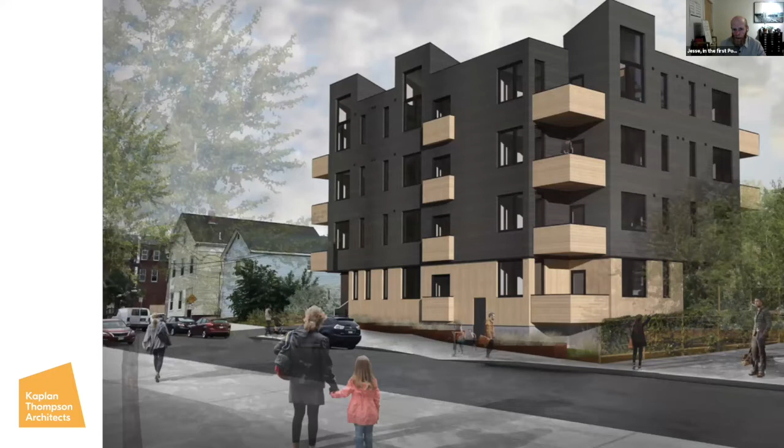And then these past years have been this. I decided this is rendering to reality. About 3 or 4 years ago, this building was a rendering, and our city of Portland put out lots in downtown saying that if developers came and said they would build affordable housing or workforce housing, they would sell them city lots. So this became a 23-unit building. These apartments have sold for $200,000. They're the cheapest home in Portland right now. These are apartments right in walkable downtown.

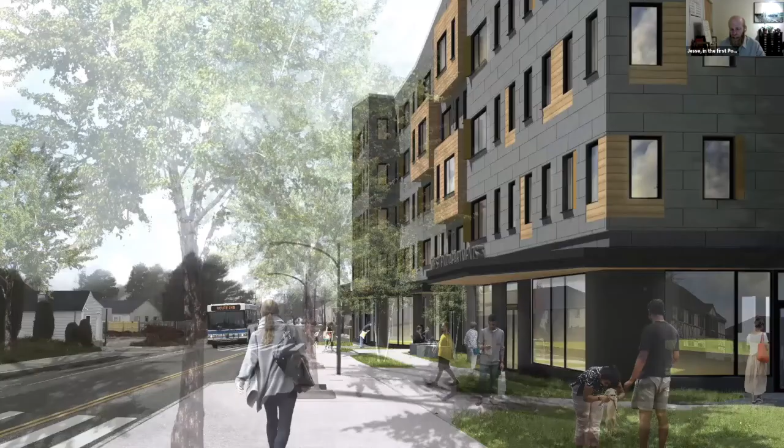This building, it's not a passive house, but it's got a lot of the techniques that everybody in this room knows. And the scale is growing. We're getting bigger and bigger jobs. This is a 5-story podium building, a 60-unit apartment building.

We are framing. We're going to go see the polished ground floor concrete tomorrow. This is for Avesta Housing, funded under the Affordable Housing Program in Maine. It's a tax credit building for folks who work in that world. Yeah, so this has to meet all the most stringent budgets, and it also has very strong energy efficiency goals.

But today, I'm here to unveil the trademark Nucifus system, the Northeast United States Passive House Enclosure System Package. Trademarked—not really, it's all generic. You can all use this.

This is the territory we work in to pull off passive house in affordable housing. We've had to develop this because we can't run new wall systems every time. We had to settle on something to be able to keep moving to get to scale. We were approached by a company in Massachusetts who develops affordable housing, and they work at scale.

They work from Virginia to New Hampshire in affordable housing, and they only do affordable housing. As state agencies up and down the country have started incentivizing passive house, giving bonus points in the competitive scoring round for affordable housing, they've been applying. They started saying, here's an avenue we can get into. They saw us give a presentation. They called and said, hey, you know how to do affordable passive house at crazy costs. Come help us do this.

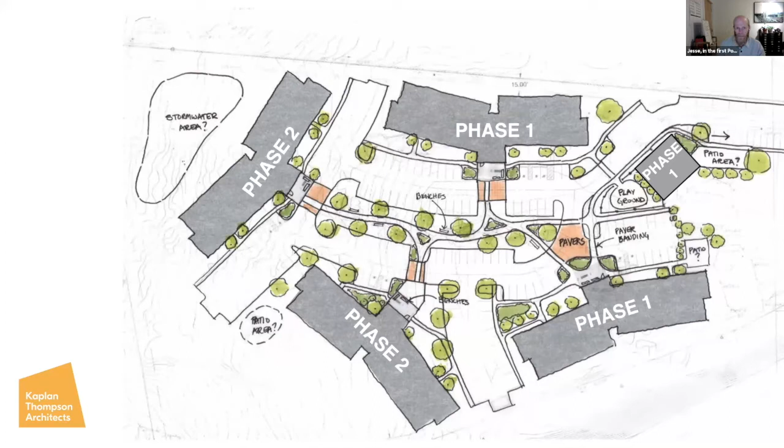And here's our very, very efficient floor plan. Again, sort of through the crucible of affordable buildings, especially affordable buildings in Maine, we build very compact floor plans, double-loaded corridors, these simple wings that you can crank around a joint with your lobby in it and bend it to site, have a good entrance.

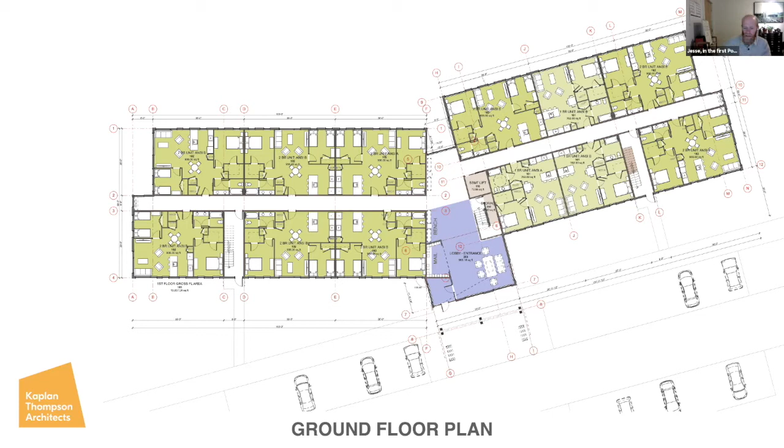Each building has a slightly different color at the accent in the middle, so you know which one's yours, you know where home is. You've got a place to maybe go have a picnic with your kids in the middle. A lot of parking. These are these funny lots, they aren't really rural, they aren't really urban. They're these suburban lots that they can acquire affordably. A lot of car parking in these towns, honestly.

Here's the next one. This is Cedar Pointe in Newington, Connecticut, outside Hartford. 3 buildings. This is an old auto dealership they bought. This is the kind of project these are, these very, very real projects.

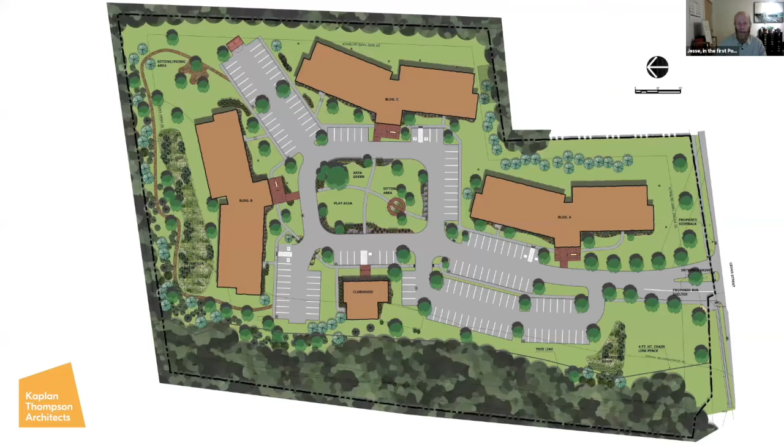3 buildings at this one, slightly different colors, slightly different roof lines. This is the prototype, getting modified. This is this funny thing, where does this fit in custom high-end architecture? But these are buildings that can fit into these New England communities, they have gable ends to signal the scale that fits into these communities.

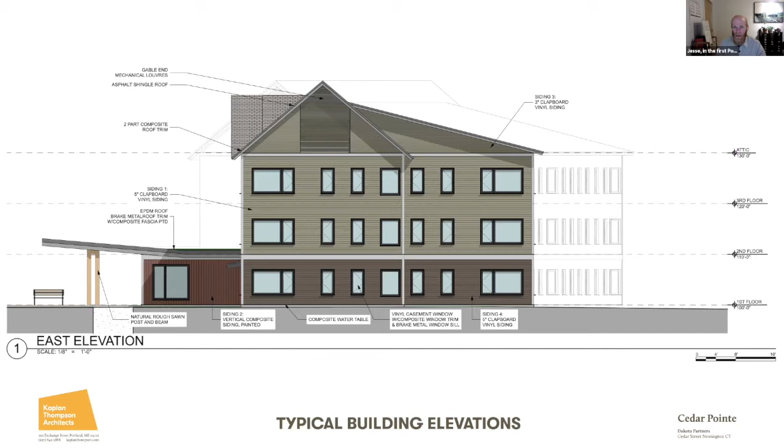Affordable housing is trying not to have zoning wars. They don't want angry neighbors. They get angry neighbors just about every community they come into. So it's trying to be fairly conservative for design. So here's the first one.

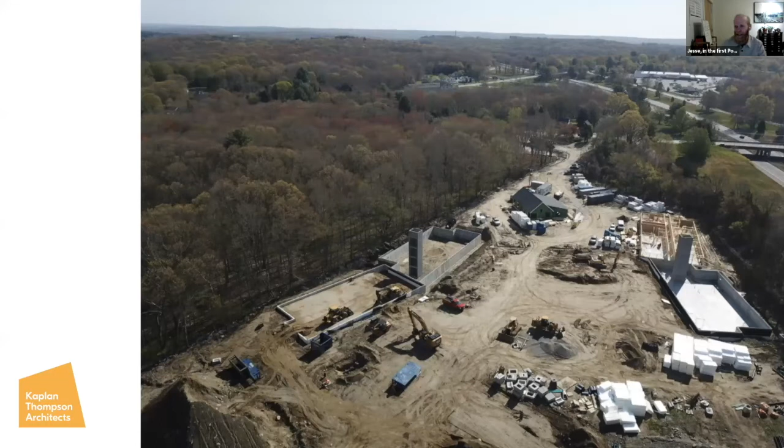Here's the building site from the drone, and you can tell it's a passive house because there's our giant white cubes of insulation scattered all around. Our sub-slab insulation going in, the giant pile. 2 buildings and a clubhouse.

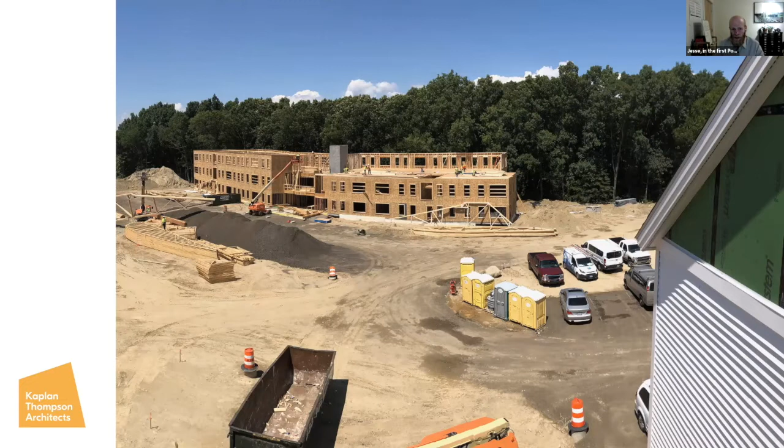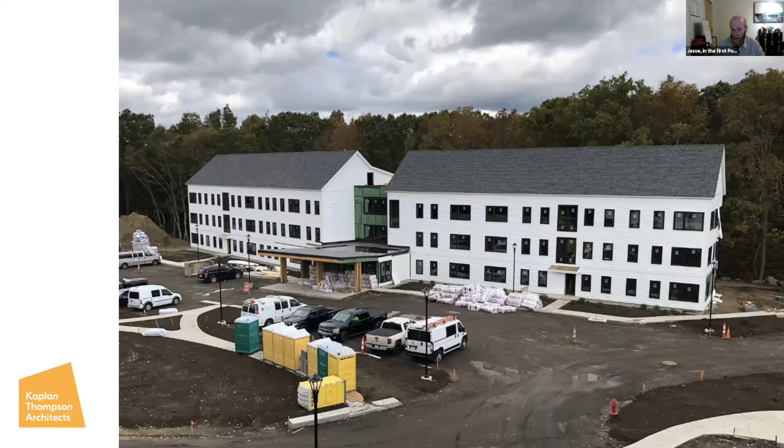You can see building going up, moving rapidly. Trusses over there stored. Multifamily building, this is familiar to anyone who works in this sector. Here we are partway through. Yes, that's vinyl siding on these buildings. These are, again, very, very tight cost constraint buildings going up, but all working and committed to be passive house.

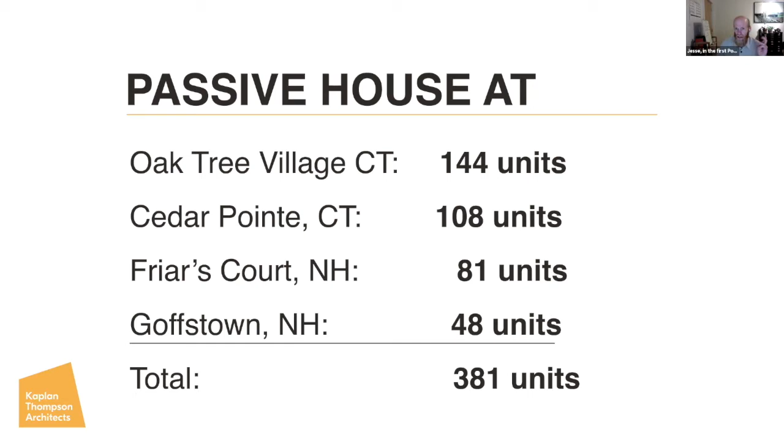So here's the matter of the scale we're working at: 144 units in Oak Tree Village, 108 in Cedar Pointe, 81 in New Hampshire, 48 in Goffstown, New Hampshire. 380 apartments rolling out of our little group, all committed to passive house, all getting built in 2 years probably here. So what are we doing? How do we do this? What's the system that has worked for us? I'm here to spread the word to everybody working in these kinds of buildings.

These are trying very purposely to be big, simple boxes. These are slab on grade, truss roof buildings, wood trusses, slab on grade, hopefully no basement.

Very simple geometries on purpose, not a lot of jogs in and out, not a lot of roof line changes, things that you can air seal easily. You've got a flat air barrier in the attic, a flat one on the wall.

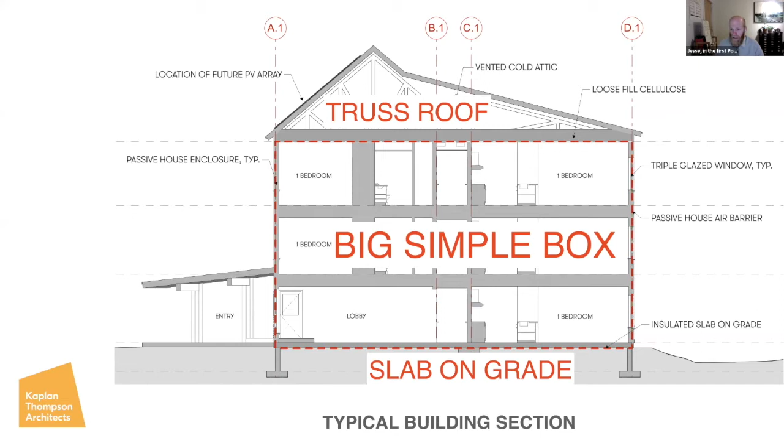We use exterior air barriers. Zip has been a savior for this market sector because not everyone can buy it, but everyone understands it. And then I think most importantly is, what's the ventilation?

The ventilation systems are by far the most critical thing we've realized in this, and we are doing very good ventilation systems, like 85% efficient systems, and sort of these rooftop or in the attic, or maybe at the end of the hallways. Companies like Ventacity and Semco and Tempeff and RenewAire, these really, really high efficiency systems, maybe 12 apartments per unit per ventilation box.

We're not doing one huge one, not hopefully one per unit. You are running it down the corridors, which are also crammed with tons of stuff, sprinkler lines and drain lines and hot water lines. But luckily they aren't insulated. They aren't moving heat and cooling. They are just sheet metal.

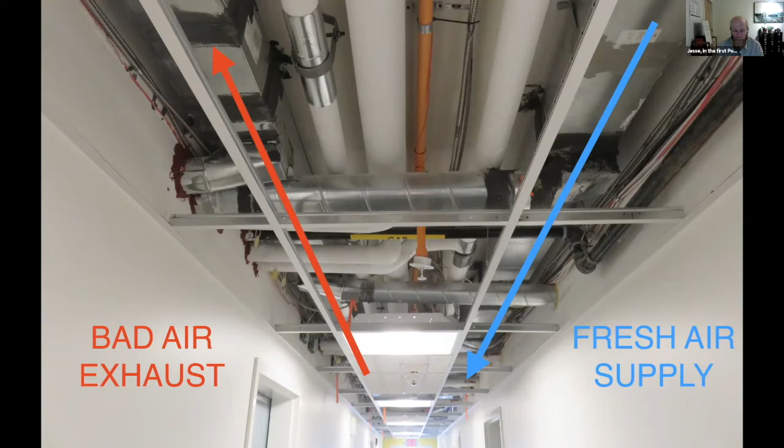Here's bad air leaving and fresh air coming in. And heating and cooling systems.

These are often starting out with VRF systems. These people are all putting cooling in their buildings. These are on the East Coast. Until you maybe get up to Maine, people really can't picture not having air conditioning in these buildings. And Connecticut, for example, is getting pretty hot these days. It's hotter than it was 20 years ago.

So VRFs, big cost issue. These are expensive, complicated, computer-controlled systems, big refrigerant issues. It's very easy to sort of specify in the beginning, and there's this constant cost drag that you can't afford them in the end.

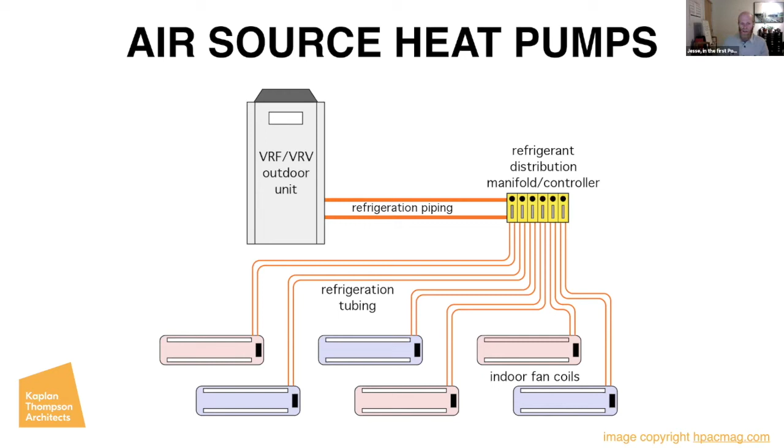Windows, we are doing almost always vinyl, triple glazed windows, casements and awnings. They are companies like Matthews Brothers out of Maine or Paradigm Windows, or European tilt turns. They are not that well insulated, and quite frankly, they don't need to be.

Maintenance, durability, not confusing residents are really big issues, as are installing something with a window flange. After trying too many times to do flangeless installs, we just try to do flanged installs now on the outside air barrier that you can tape and seal just like every contractor's used to, and not having to pick a fight over that is a pretty normal technique for us these days.

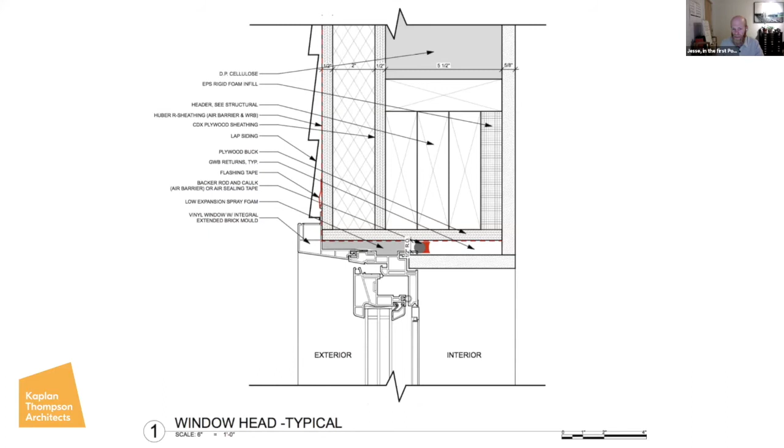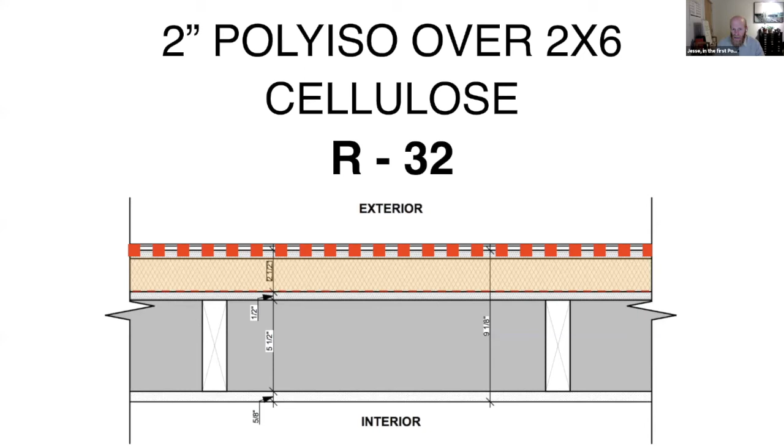And then finally, after we've got through all that, what's the insulation values? Well, they aren't very high. We are 2 inches of foam on a 2x6 wall for these buildings. Maybe 3, 2.5. This is just a code building in our climate, IECC 2018 or 2021. We just don't need a ton of insulation, we've discovered, and it's kind of come through the ring after we've gone through all these journeys.

It just doesn't look like what we think of as a passive house.

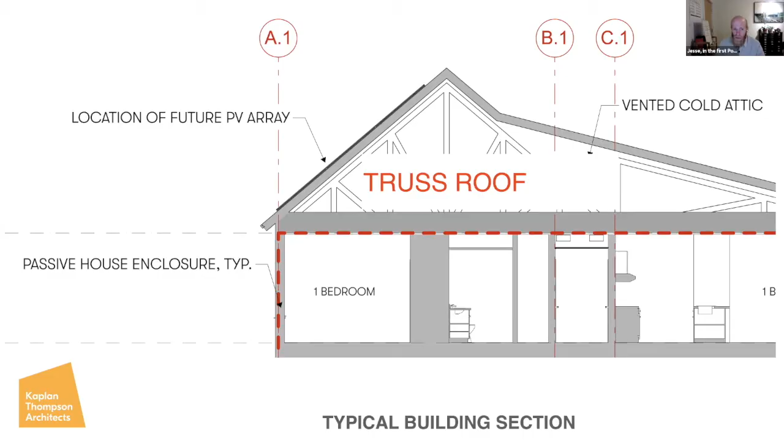These truss roofs, one really critical lesson that we learned from other folks is a hard air barrier under the attic. So plywood, zip, something screwed to the trusses that's not spray foam from the top. It's not poly. It is a thing that slows down the electrician. It slows down the mechanical installers. It's really hard for them to cut through. They hate it, they curse at you. Nobody really likes hanging sheets overhead, but this is the thing that makes these air barriers work in these buildings.

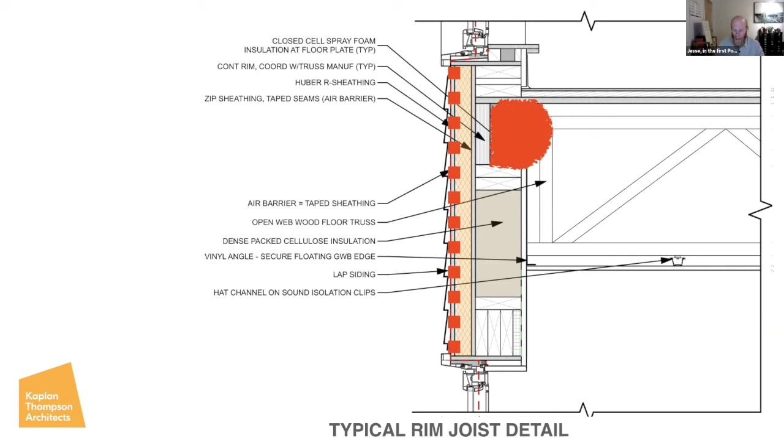We're just completely convinced, and keeping lights and all penetrations out of these attics. We really use very minimal spray foam. Like the rim joists where the trusses land is about all the spray foam we're doing in these buildings. So really low embodied energy insulations, cellulose, polyiso. We're not spray foaming these buildings, doing big, thick spray foam double stud walls or anything.

Slab on grade buildings, we're trying for those. Sometimes we have basements, but we're looking at 3 to 4 inches of foam under the slab. It's not the foot thick foam of the old passive house single family archetype. We are thermally breaking them very carefully, but we don't have a lot of room. Our walls aren't that thick, so we don't have a lot of room to hide a giant thermal break. So we have a thermal bridge here. We put a little exterior foam, we warm it up, but it's still pretty good construction.

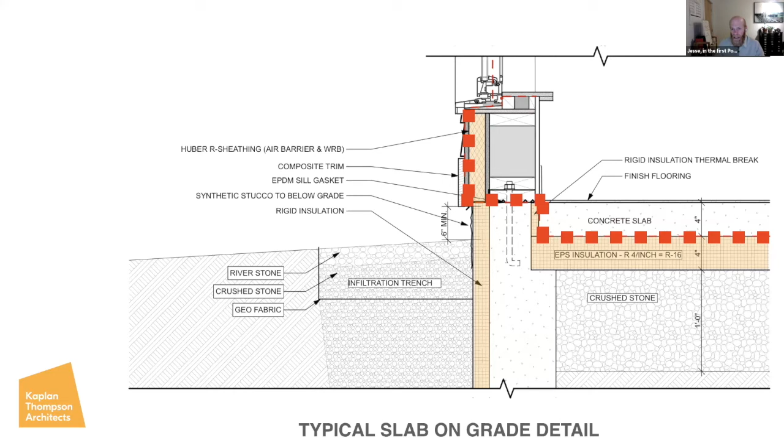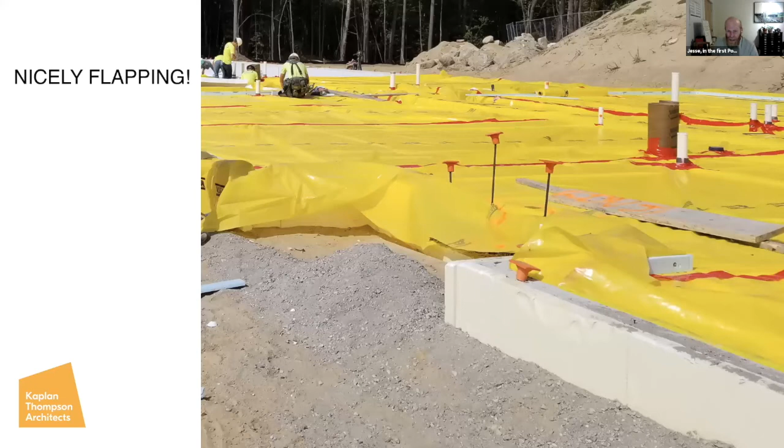Almost invariably you get ready for the site team to very helpfully trim all the poly air barrier back, and you show up on site as they're pouring the slab and say, oh, we really, really need you to continue the air barrier out to the outside. Thank you for cutting it so neatly, but we would much prefer this. They do it on the first one, and by the second one, they've sort of got it that you need to leave the flap long and tape it to the outside of the wall, and you need to get this under slab air barrier really, really, really well done.

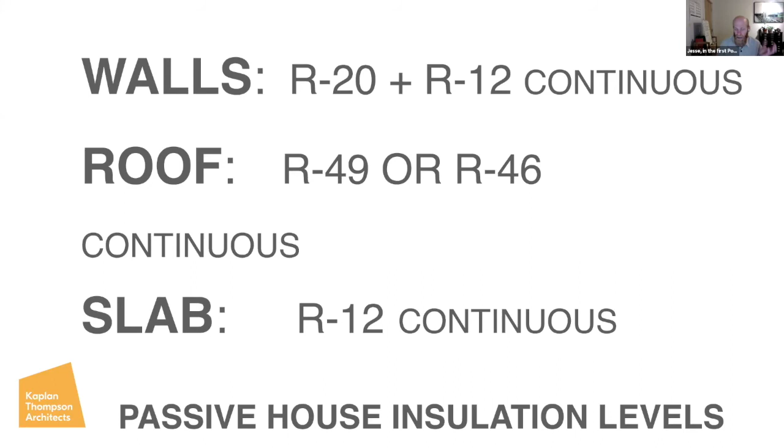So here's our sort of insulation levels. This is what we're putting in these buildings: R20 plus R12 continuous, R30-ish, R49 roof, R46. Anyone who works in our climate, these are code. This is the building code.

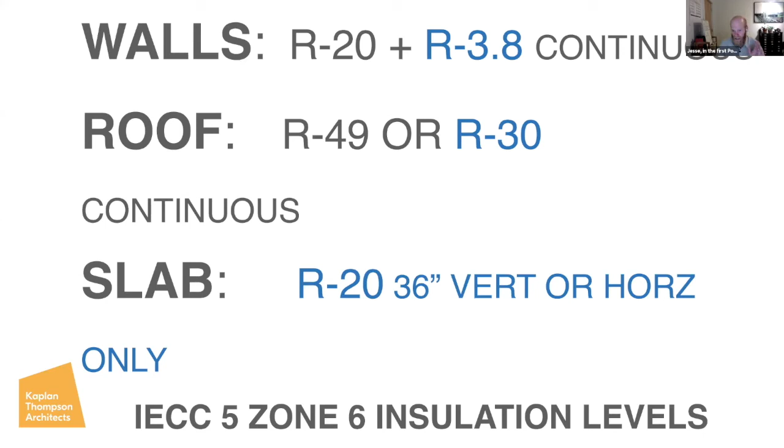R20 plus R3.8, and here we are at R12. We're not trying to talk about our insulation — we don't want it to attract attention. We love that it's basically at code levels, because it stops the cost-cutting fight everyone's used to doing. They all know how to reduce insulation; every contractor worth their salt can strip insulation out of a project. But if you're down at code, there's nothing to push against.

One really critical thing is quality assurance and quality control. This would not work — we are barely pulling this off — if we didn't have a team like Steven Winter doing Energy Star inspections, HERS inspections, and testing out the ventilation systems. The ventilation systems never work; it takes three or four visits to get these things balanced. It seems invariably hard to pull off, with people like Carla Butterfield out on the site pulling her hair out trying to get people to do it, and blower door testing these things. We don't have the hours to walk through and inspect every stud wall. It just wouldn't work.

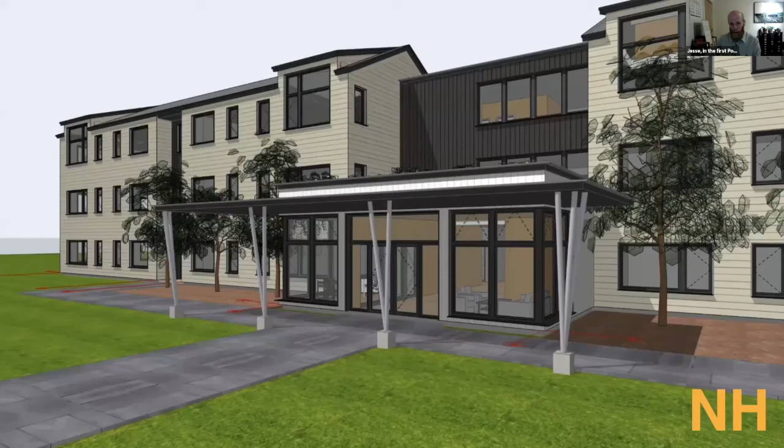So here's the next example: Hudson, New Hampshire, another 45 units with another 36-unit building rolling. They are now framing, and they're in a cost crunch, and we're redesigning the ventilation system as we speak, with walls being framed. They're trying to move from central rooftop units to one ERV per apartment. Right now ASIs are flying, we've got design-build mechanical contractors on the phone, and it's all happening in the middle of the COVID era. It's a little frightening, but we're getting units built, right?

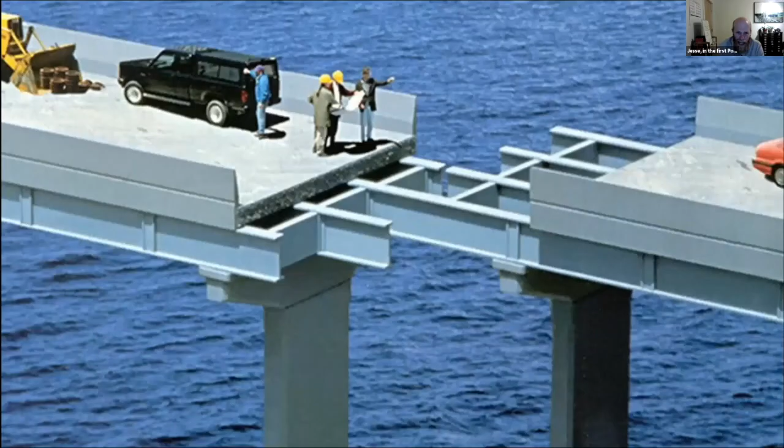So here's our key lesson for you all. I think this is the dream of the passive house consultant architect — that you're just cool, pulling all these buildings off, driving down the road. The reality is you're really building a car as you're driving, taking the wheels off, working on the ventilation system. There are moments when there's a lot of stress in the air about whether you're going to pull this off. Another thing we've realized is there's a common language among us passive house people, but then there's a common construction knowledge, and you're sitting there using the same words and they aren't lining up — that's a feeling you have in these meetings.

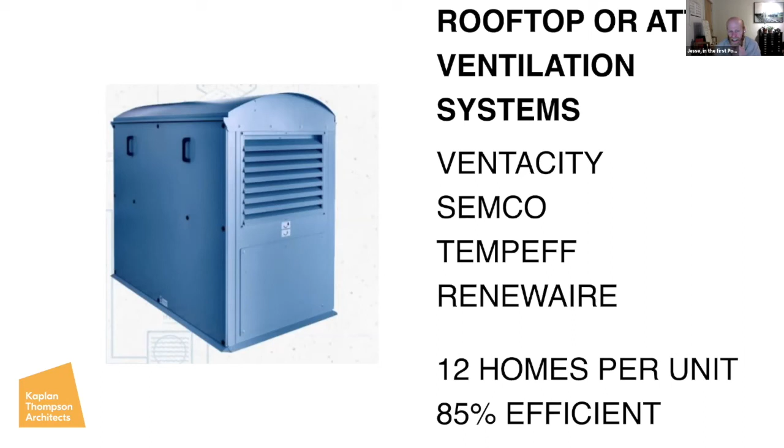Kai, who I work with, put it so beautifully. She said, why are we the ones in the meeting explaining to the mechanical engineer that you can't take a 600 CFM ventilation box and get 600 CFM of air out of it? Why is the architect the one who knows you have to run these at 60% of their max capacity? It's like if you floor your car driving down the highway, it doesn't get good gas mileage. Why isn't everybody else? Why are we the ones who know this? So there are these moments where it's just, no, every single machine, 60% — start with that number.

We have learned that you really need space, and you run your energy model to be at 4, not 4.75. You need 20% headroom in your buffer that you show your client, because something's going to go wrong. Something's going to slide — your slab thermal break can be bigger than you thought, your ventilation system is going to get redesigned mid-flight. It is not going to be as easy as you think.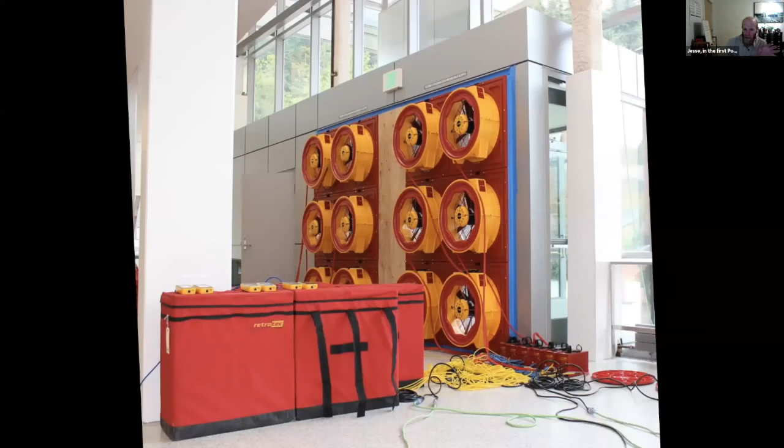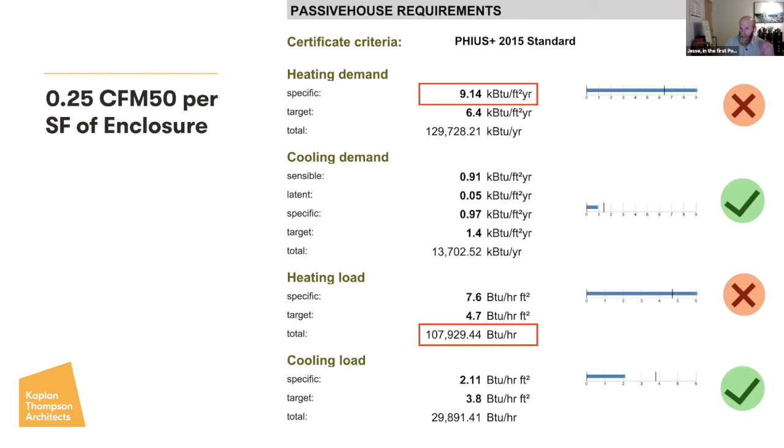We started running some scenarios, because you're always getting tested on these scenarios. If you take this building and don't blower door test the heck out of it — our state has a really good air tightness standard, actually tighter than this now, it's 0.2, but in Maine every affordable housing building for over a decade has had to be blower door tested at a pretty good level. If you just met that state-level, building-code air tightness, what we find is that the heating demand almost doubles from that one move alone. And this isn't a bad airtight building — this is a pretty good building. So what if we backslide again? What if we take our really nice ventilation system and swap it for bath fans?

Our heating demand doubles again. We go from 9 to 21 just by doing exhaust-only bath fans and a not very airtight building - sort of the standard multifamily building.

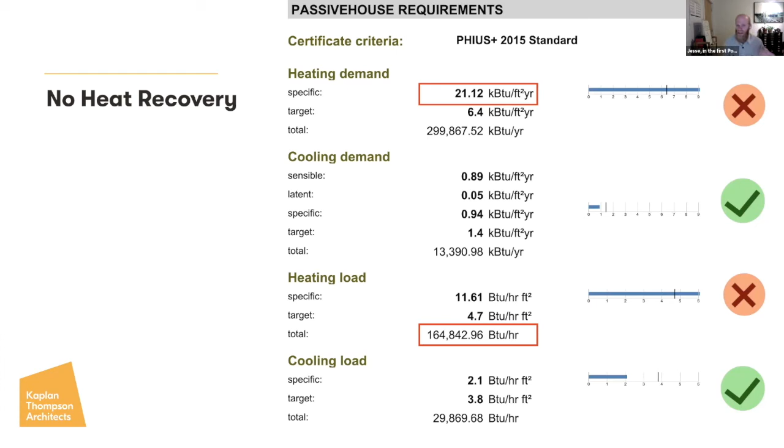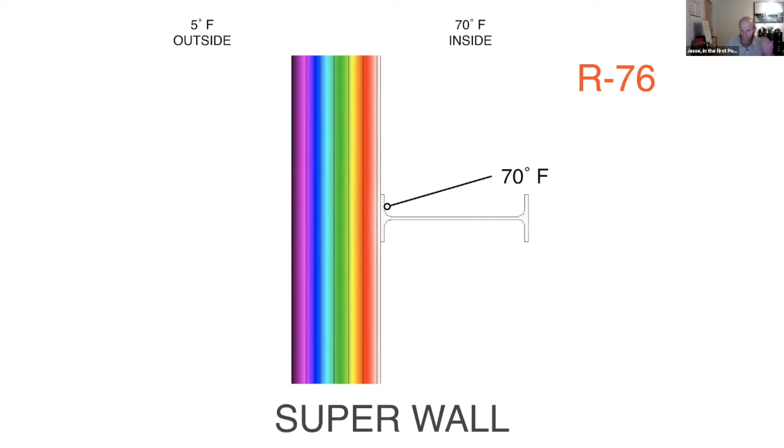We've done two doublings. Here's the test I love to show: what if you have all the money and you do a ridiculous wall, like 12 inches of foam - this is a silly wall, we'd never do this. But our walls, we've got 18-inch walls, R44 under the slab, the classic passive house foot of foam under the slab, and R145 in the attic - it's more cellulose than my height. This is like the Duluth, Minnesota single family passive house from 2001, those levels.

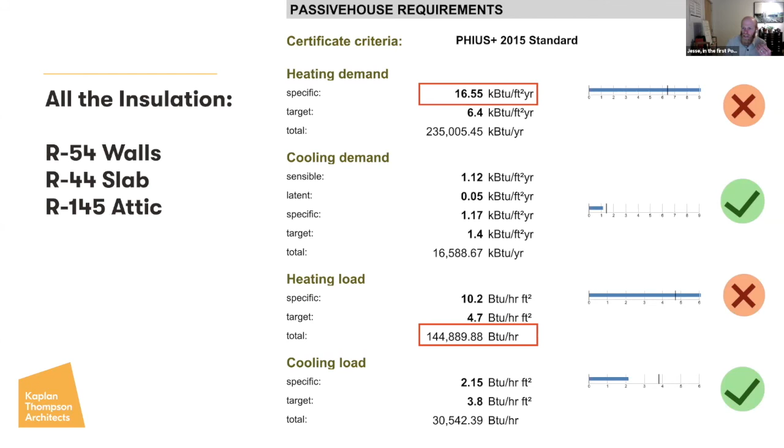We are at 16. We have clawed our way back from 21 to 16. We're nowhere near 4.92 with this, and we just bought all the insulation in the world. So the jump between this and this is not the insulation.

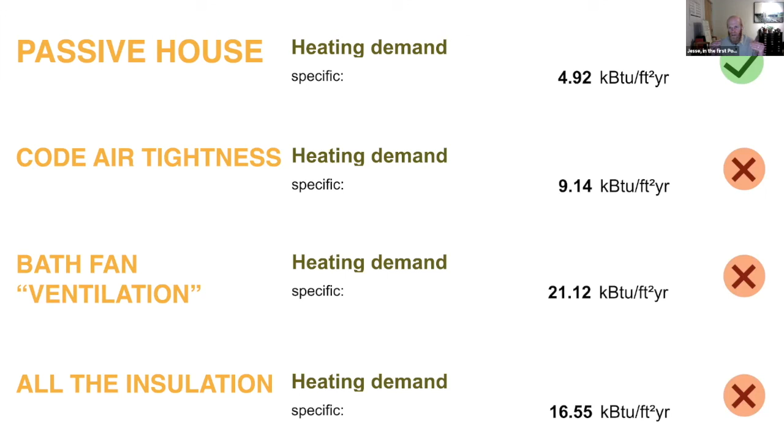Here's a chart so you can see it all at once. This ratchet down from passive house to maybe modern building code airtightness to bath fan ventilation, and then try and get back - you can't get to passive house here. One more slide, just a little bit of numbers today.

That building, that white building, had a heating load of 50,000 BTUs an hour. That's half of a single family gas boiler in heating load. Just relaxing the air tightness doubles that, and all of a sudden we're at that box.

I will say this has been a more potent argument when I sit around tables with owners to talk about heating system size, because they don't want to spend more. When you tell them, I'm sorry, we have to go buy bigger equipment - I know we can save money there, but we have to now go buy more heat pumps, we're at 160,000 - that's when they hit their limit.

They don't really care about consumption and energy savings deeply. They do care about spending more money. So you have to have a scenario where you're showing them they're going to spend more money. It's one of the key things we've seen.

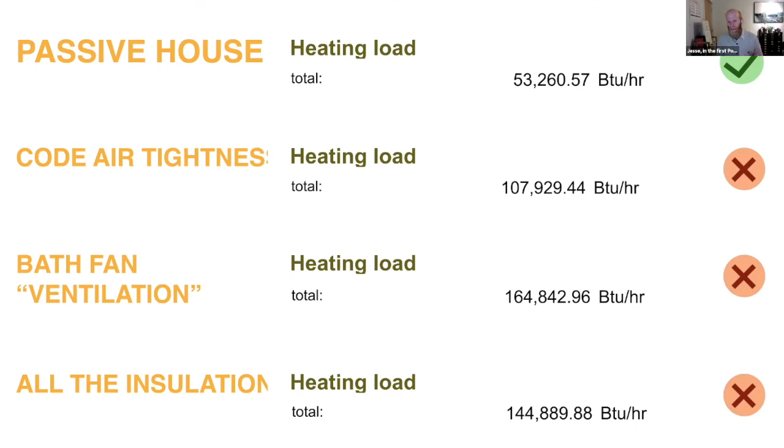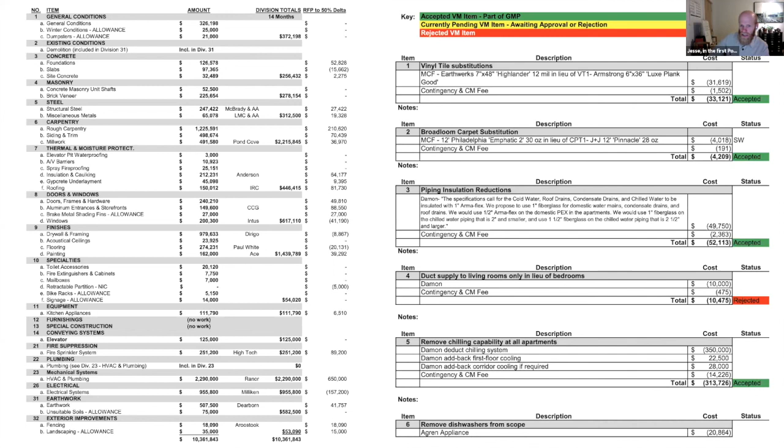Nowhere in this budget does it say, relax the air tightness and I'll give you this money back, because the contractors kind of don't know - they don't really have a number in there to go from passive house air tightness to this. It's in the labor, it's in the tape, but it's never in the line item here, and so it doesn't get challenged the same way. So this is our secret weapon - we can do this. All it takes is contractor training.

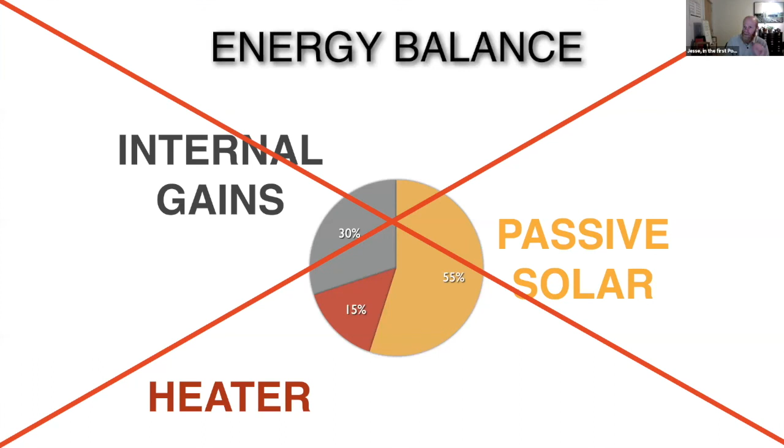One last piece we have learned the hard way: this idea I learned in passive house training that a third of your heat comes from the sun, a third from internal gains, a third from a heating system. The easiest way in a house to get to passive house is to put tons of windows on the south and crank the solar in and get free heat to push you into passive house. If you do this in a multifamily building - we are doing passive house, we're not doing passive solar house - you will overheat these buildings badly.

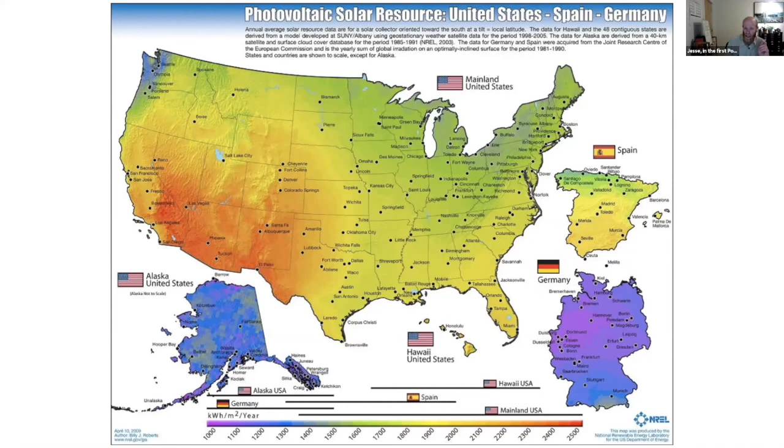So if we do lots of sun on the south of our buildings, huge windows in a multifamily building, or even worse, your apartment only faces west - most apartments only face one direction - you're going to make a little solar oven. So we have very low solar heat gain in these buildings - it looks crazy to us from the old days.

My last lesson is keep learning, keep showing up at events like this. We didn't make any of this up - we didn't develop anything in this slideshow. We learned all this from smarter people than us who had blazed other trails. So rooms like this are where it all happens. That's my little pitch.